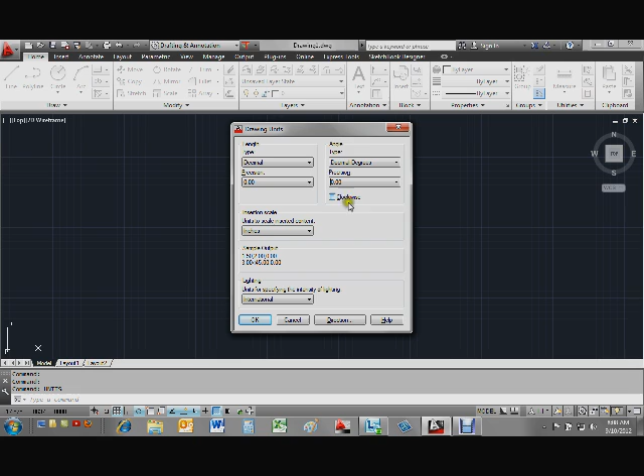If you want to check your accuracy for your units, you just type the command units and go to your drawing units dialog box and set your precision. Looks like we've got 2 decimal places at least, so let's do that. And then we go to angle and we'll set that to at least 2 decimal places. Click OK, and you notice down here in your unit display, your coordinate display, that you now changed it to 2 places.

Let's also now perform a zoom all. So we'll type Z, enter, A, enter, and this will zoom to the limits of our screen, and we'll place the 0,0 as close to the lower left corner as possible. In starting the AutoCAD drawing that we're looking at, it would be good to start this at a 0,0 location, and we'll work with that small diameter, the 1-inch diameter. We'll make that our first

entity. So I'm going to pan. I'm using the mouse wheel, pushing down on the mouse wheel and holding it and pulling the screen to the upper right, so I can see fully where my center point is. There's 0, that is where I want to place my center, and here is your X and Y marked for you in this 2D wireframe environment, working space, so we can see where our 0,0 is.

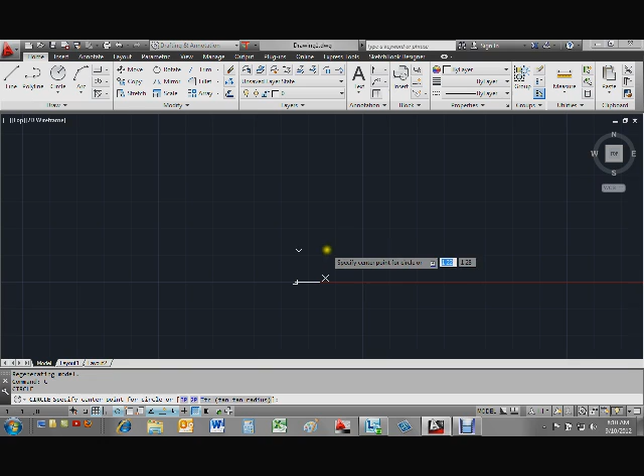So we'll start out by drawing a circle. So C, enter, and the first thing it wants to know is the center point, and I'll just type 0,0. Then it wants to know the radius, which will be 0.5. And I'll zoom up just a little bit. Okay, our next circle that we're going to draw is part of that circular slot to the right of this small circle.

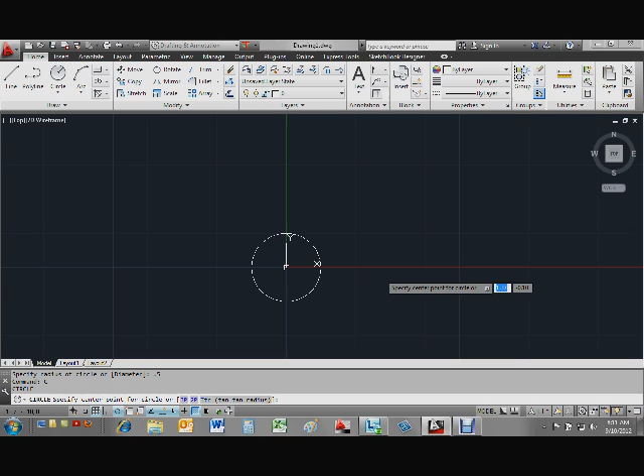Let me rethink that. Let's go ahead and draw the 2-inch circle while we're at it. So I'll type C, enter, to start my circle. The center point will be back at 0,0, enter. And then the radius for that will be 1. It's a 2-inch diameter. And get that in a little bit better position.

Then we're going to draw the circle that's going to be part of the construction for the circular slot. So that's a 1-inch diameter, and it is 3 inches to the right of what we just entered. So I'll use the relative move. I'll draw a circle, C, enter, and for the location that it asks for, I will use relative move. @ for a relative move, and in the X direction I'm going to move 3, and then in the Y direction I'm going to move 0. Press enter, and then the radius will be 0.5.

Alright, then the next circle I'm going to draw will be this circle up here that's part of that circular slot. It's 40 degrees from the center over here. So to be able to use my relative move, I have to reset my last point entered to this point. Okay, so I'm going to type ID for identification of point, enter, and 0,0, enter. Alright, and that resets the last point entered.

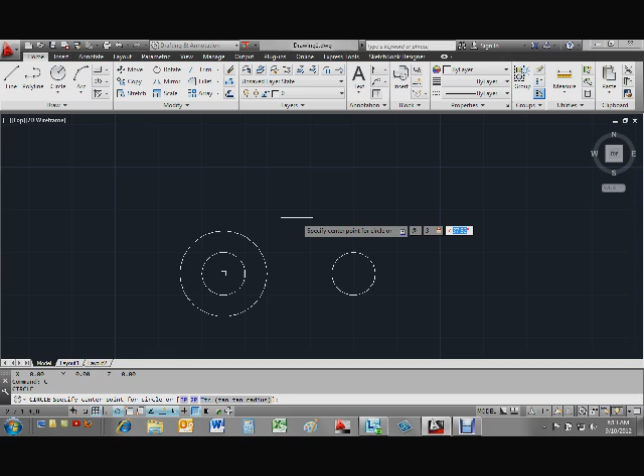Then I go C, enter for circle, and the point for the circle would be @ for last point entered, and then we want to go 3 inches, so we'll go 3, and then the less than symbol to enter a degree, and then 40 for the degrees. And then the radius of the circle is 0.5. Okay, we're going to be doing lots of circles. So that was the last point entered.

Whoops. Let's see. Keep the current. Don't show this message again. Thank you. Windows 7 trying to help us out.

So the next circle I'm going to draw, when you're looking at that circular slot that looks kind of like a racetrack or maybe a kidney bean, we're going to begin with a radius of 3, and the center point is at 0,0. So let's try that. Let's do circle. We're going to end up with a whole bunch of circles on here, and the center point will be last point entered.

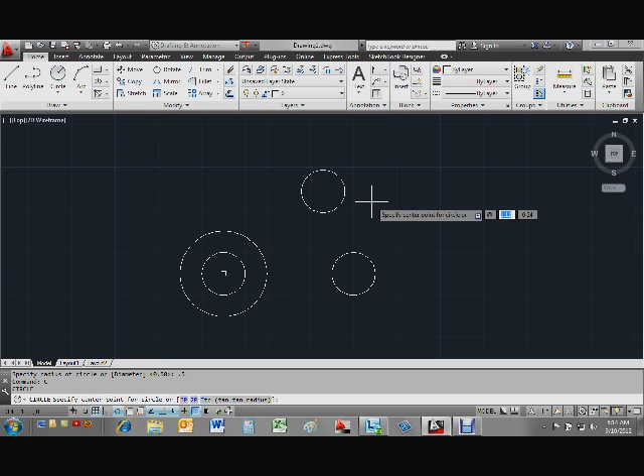Whoops, start that over. Circle, and center point, I would just press enter, and we'll press 0,0 for our circle, and then the radius will be 3. And that's that center circle passing right through the center of those two.

Alright, then we will use circle and draw the next radius circle that is actually a ½ inch larger. Okay, so circle, and the center point will be 0,0, and then the radius of it will be a ½ inch larger, so that would be 3.5. Okay, and then press enter again.

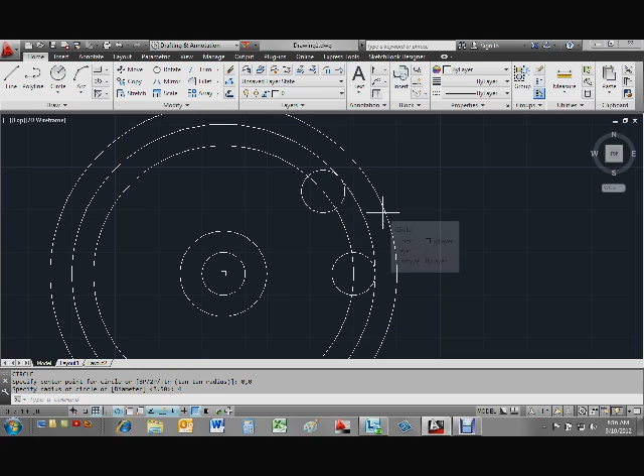0,0 for the center, and we want it another ½ inch larger, so it'd be 4. Then we draw another circle, and it'd be a ½ inch smaller than our 3 inch, so it'd be 2.5. 0,0 for the center, 2.5. And then one more.

Press enter to get the circle command back. 0,0 for the circle center, and the radius will be 2. Okay, and that will make up all of our racetrack design that we have on there. Now we need a circle where its center is where this one was. We could have drawn the additional circle when we drew this one.

So now we'll have to create a center that's at 3 inches and 40 degrees from here. So circle, center point would be 0,0, and then the... whoops. Circle, enter, center point will be relative move, 3, less than symbol, and 40. And then the radius for this one, it says on the drawing, is 1.

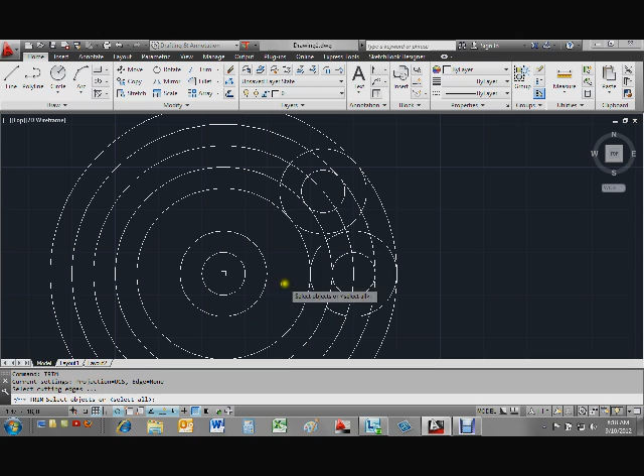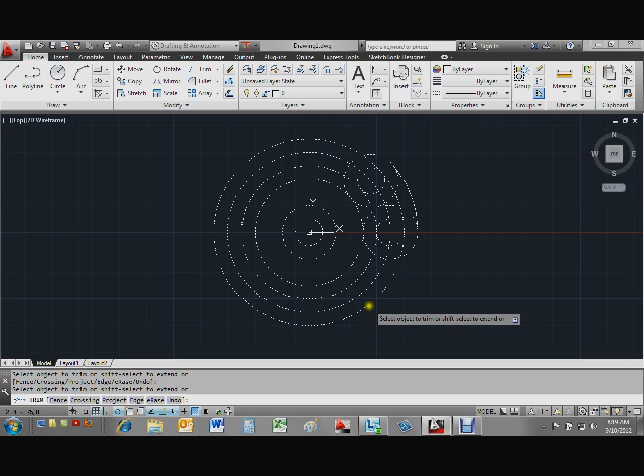So let's go to trim, T-R-I-M, and the first thing it wants to know is select cutting edges. What I like to do, I'll zoom out, is just do a crossing window, moving from right to left, and make everything a cutting edge. Then I'm finished selecting cutting edges, so I press enter, or you can right click, and I'm going to trim off by clicking down here at the lower right all those circles.

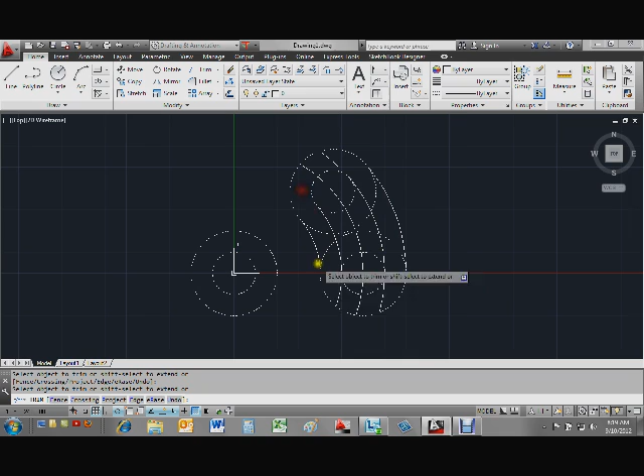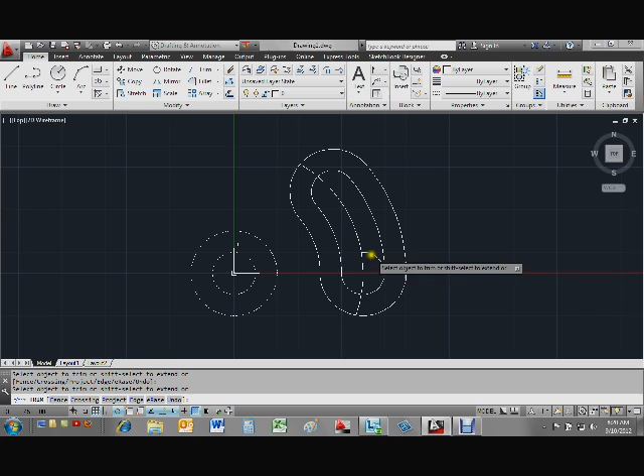Now I'm still in the trim mode. I'm going to zoom a little bit, and now I want to finish my design, so I'm going to trim to the sides here, and then trim out the slot shape. Now, circles are drawn counterclockwise, so you need to trim in a counterclockwise fashion. Alright, I'll just leave that center line there. Press enter when you're finished.

Next, we're going to draw the large arc over here. That's a 5-inch radius. So we go to our draw panel, our circle command, and we pick tangent, tangent, radius. Notice the 3 little dots after my O-snap symbol. That means it's a deferred tangent. It's waiting for more information. So I'll just hover until I see that.

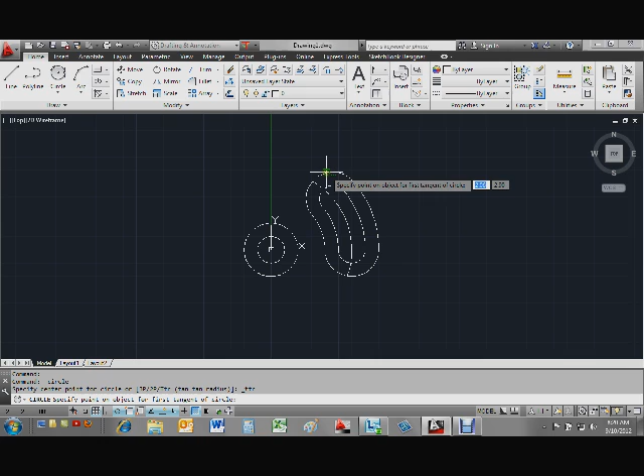I know it's going to connect somewhere near the top, the way the design looks. So I'll pick over here, and then over here because it's going to connect about in that area. Then it wants the radius, and I'll key in 5, and we'll trim that up. You can type TR, enter. That's the shorthand for trim, and this is our trimming cutting edge.

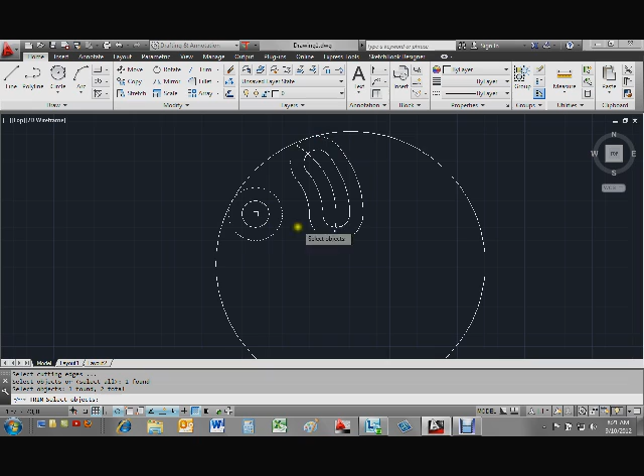I like hitting the space bar instead of the enter key to continue the command, and then counterclockwise, so I'll pick over here on the left hand side. Then enter when I'm finished, and go back to tangent, tangent, radius, and this one's going to connect somewhere in here and somewhere down here, and it's a 3-inch radius.

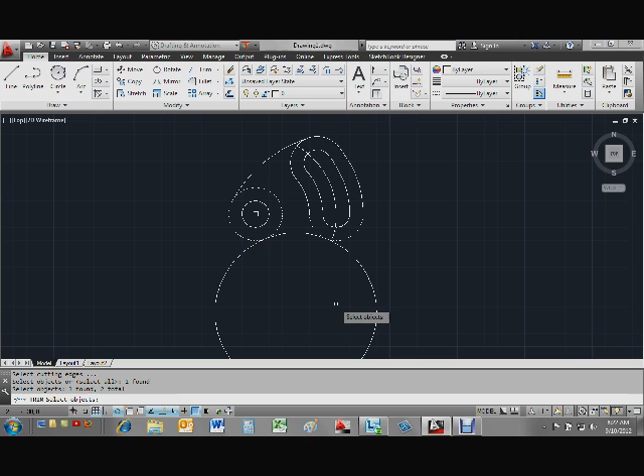Then TR, enter for trim. Pick this circle as a cutting edge, and this one as a cutting edge. Press the space bar or enter or right click to continue, and trim over here on the left hand side. And press enter again. Alright, so that gets you the basic shape.

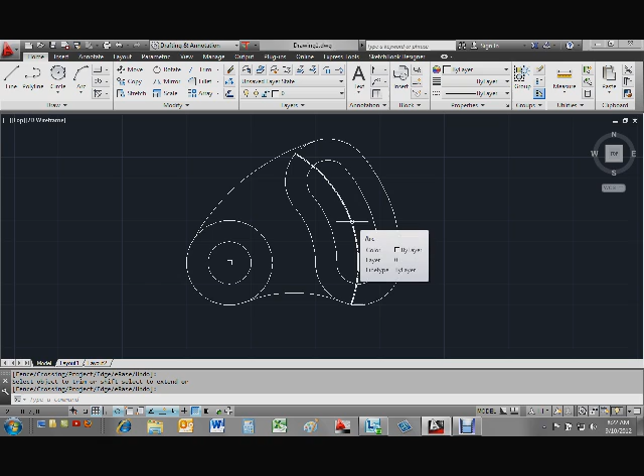We won't cover in this chapter how to change line types. We'll do that later, so I'm going to delete that center. And this is what your finished product should be when you turn it in to me.